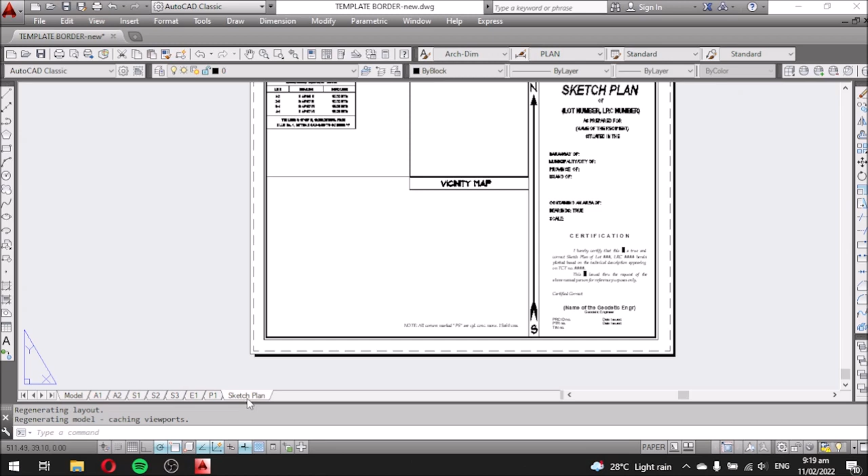Once you open the template border file that I suggest you download, you have your template border for your sketch plan. All you need to do is create your 2D drawings in the model tab. After you draw the sketch plan, you're going to arrange your drawing into the sketch plan template. Then after that, you're going to plot this in image or PDF.

First, you must transfer the title description coming from your image that you have acquired. Just like what I've said before, based on your title, there is a technical description indicated. So try to read your copy of the certificate of title.

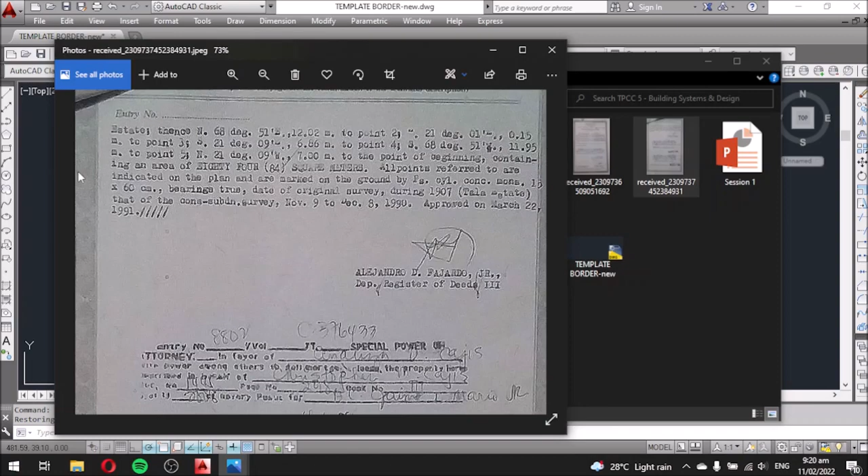To do that, we will use the text command, this icon with the letter A, then we'll write it.

We'll categorize it. First, we'll do the line. Then use the Fluxxion Architect font, if that's okay for you, the font I suggest you use.

It's small, that's okay. Next, on the left side or the right side, we have the bearing. Then on the other side, we have to put the distance.

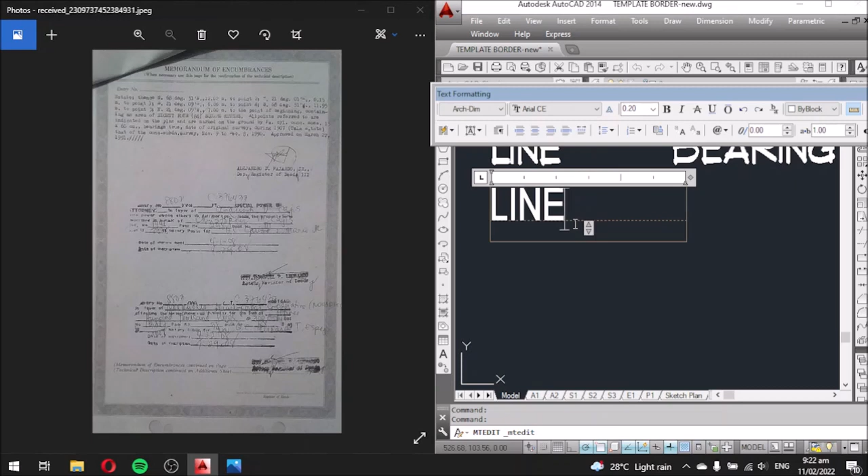Let's just copy this. To copy, simply type CO, so it's faster instead of clicking the icons. Type CO, then press enter or space. Now for this part, we'll use the font Arial CE. Just in case we need to use symbols like degrees, I think the numbers look nicer and clearer in Arial CE compared to using Fluxxion Architect font, which has a design for numbers that might be harder for readers to understand.

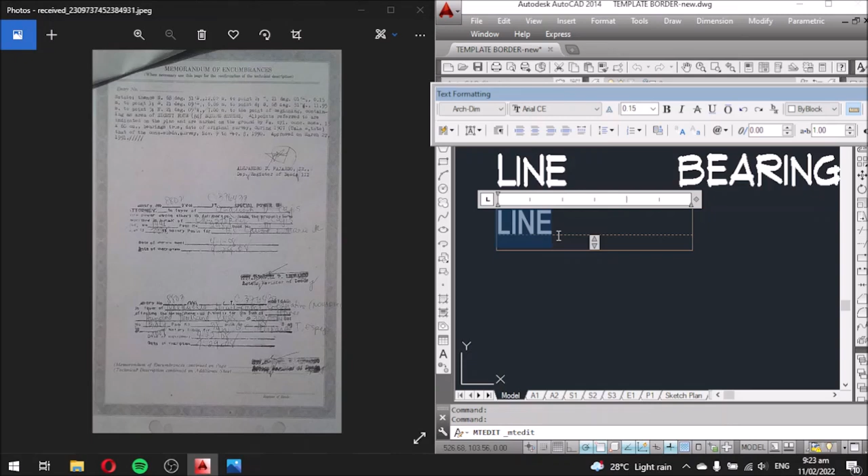Of course, our line is bounded by points, let's say point 1, point 2, point 3. What we take under this line column are the boundaries, so we'll put boundaries 1 to 2. Let's just copy, type CO down, then 2 to 3.

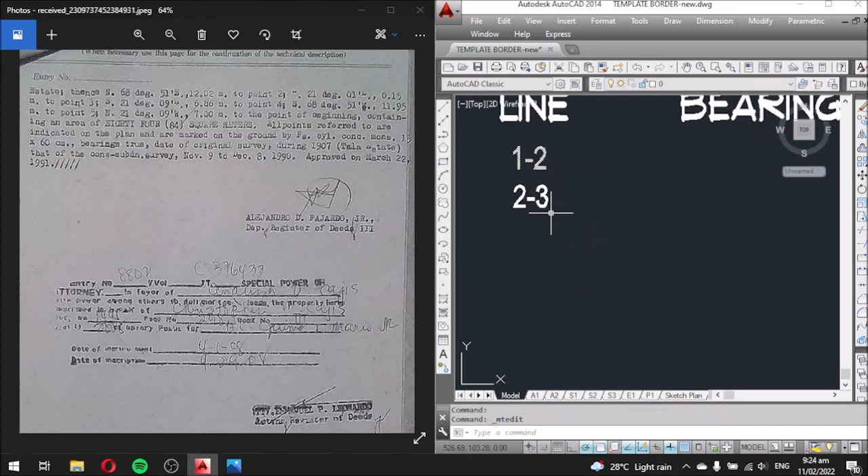By the way, you need to take note of how many points there are. So like this: point 2, then bearing distance to point 3, bearing distance to point 4, bearing distance to point 5, bearing distance to point of beginning. Meaning there are 5 points.

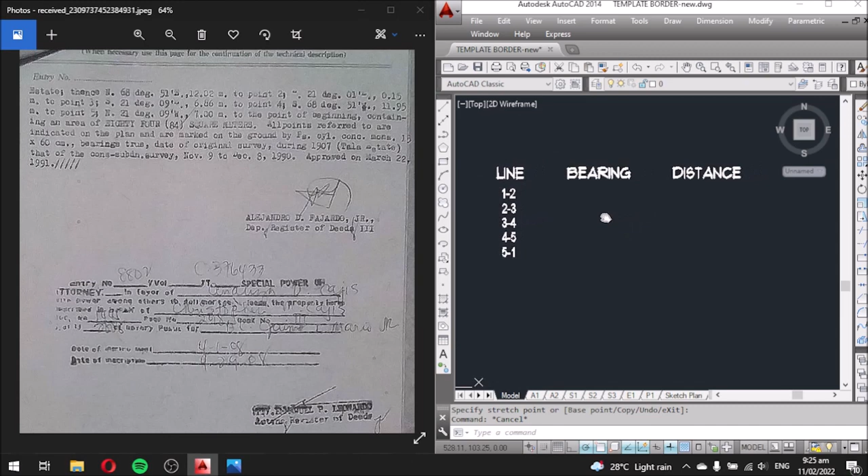So let's limit the size of the text box. On the next portion, the bearing part, let's just increase it. Now for the bearing part, our first bearing is north 68 degrees 51 minutes east.

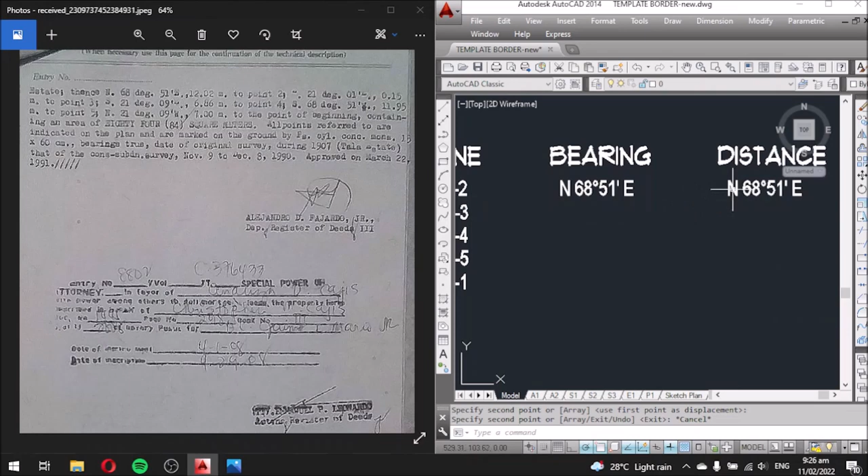So capital N, then 68 degrees - the degree sign can be found with this symbol - degrees, then 51 minutes east, space east. Then the distance: the equivalent distance is 12.02 meters, or just M.

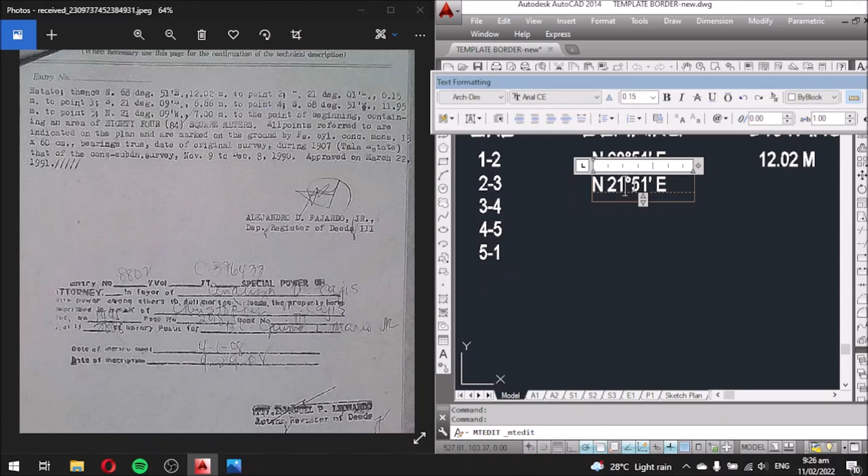Next, the second bearing, going to point 2 to 3. Our second bearing was north 21 degrees 01 minutes east. Then the distance is 0.15, so we'll put the M beside it.

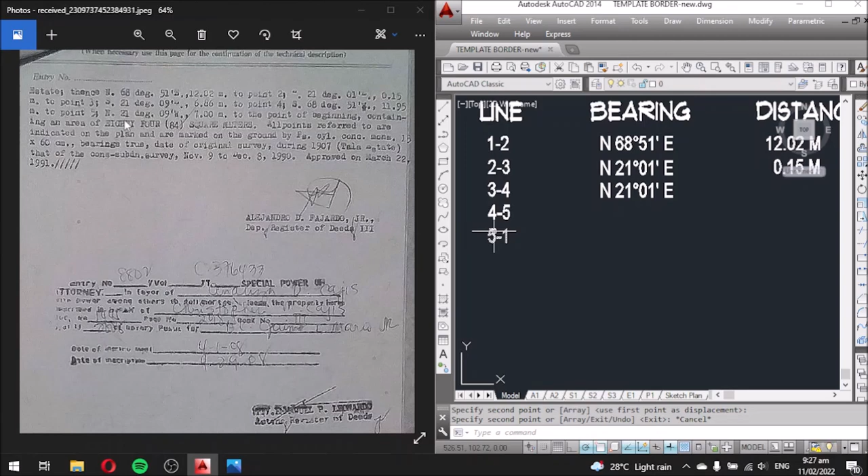Next, the second or third bearing: we have south 21 degrees 09 east. Then going to point 4, the equivalent distance is 6.86.

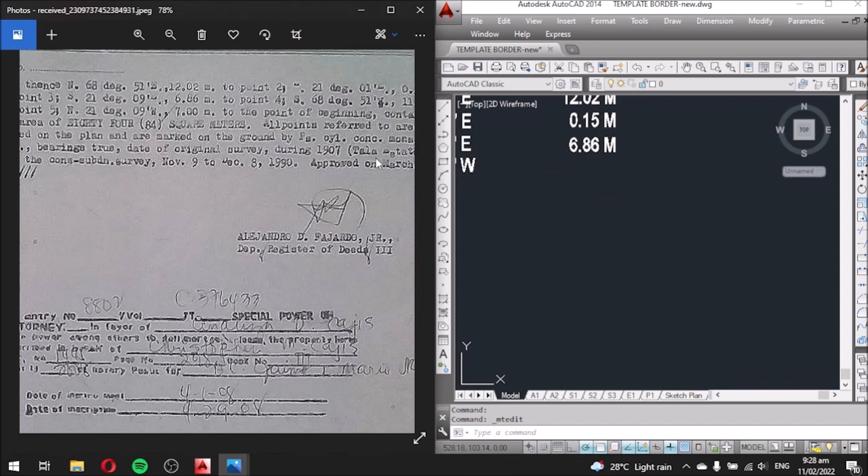Okay, so next is the following bearing, from south 21 degrees 09 minutes here, going to the next bearing, south 68 degrees 51 minutes west. Okay, its distance is about 11.95.

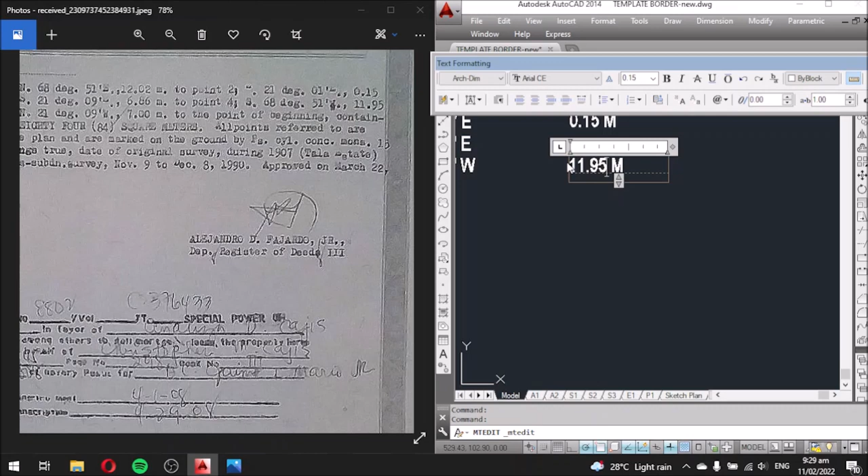And lastly, going back to the origin, its bearing is north 21 degrees 09 minutes west, and the distance is about 7 meters. Alright, so now we have complete the bearing and distance.

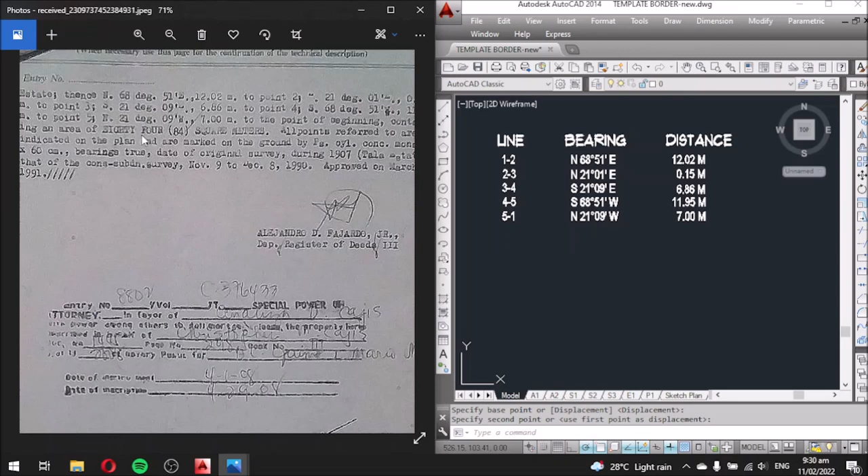So if you might want to check, you may check the bearings in case there's a discrepancy. Okay, the first line is north 68 degrees 51 minutes east, with a distance of 12.02. Then the second line is north 21 degrees 01 minutes east, 0.15. Then the third line is south 21 degrees 09 minutes east, 6.86.

Then the fourth line is south 68 degrees 51 minutes west, then 11.95. Then lastly, the line connected to the origin is north 21 degrees 09 minutes west, 7 meters.

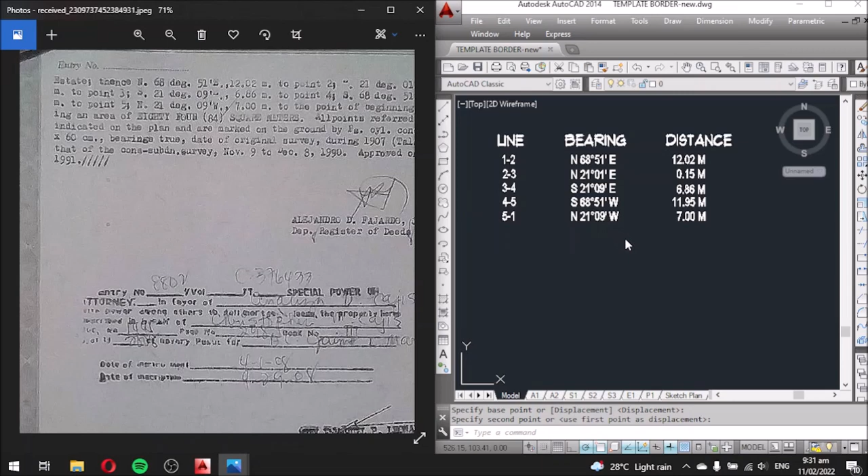Okay, now let us begin plotting the lot area. All you need to do is simply use the line command. Let's minimize this and maximize our AutoCAD application. Okay, so using the line command, first specify the first point anywhere.

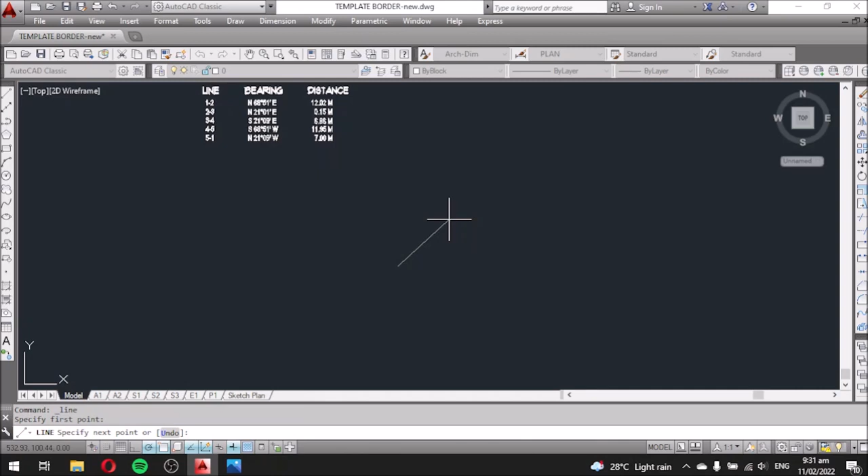Okay, first point here. Then at the bottom portion, we will type the following. Our first bearing was north 68 degrees 51 minutes, then 12.02 is its distance. At the command portion, type 'at', then distance 12.02. Take note, we are still in the line command. After clicking the line command, click the origin point on the open space, then you type this.

Then type the less than sign, pointing the arrow going to the left. Then type the bearing: north, small letter N is fine or capital letter, then 68 without space, 68 degrees. You can just type 'D' for degrees. Then the minutes is 51.

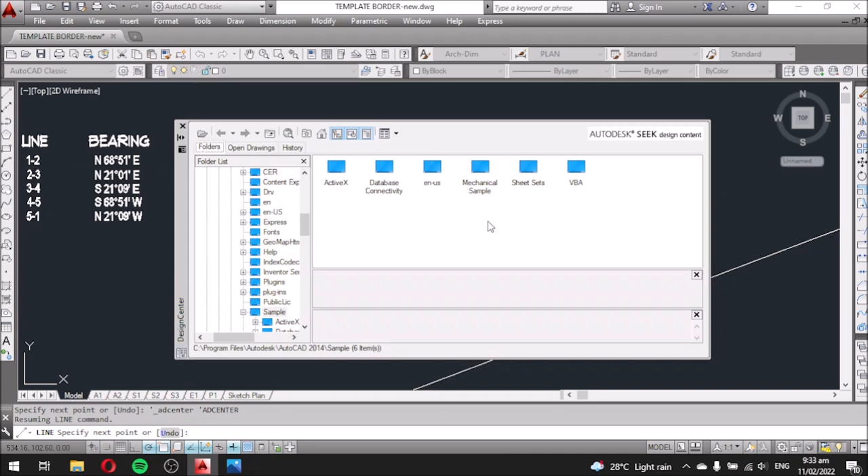Okay, at, 21... distance first, 0.15. Okay, so arrow, less than N 21 D, 01 or just 1, then the quote symbol, then E, then enter.

Next is at, okay, the third bearing we have 6.86. Okay, arrow, then S 21 D 9, quote, then E, then enter.

Next is the fourth. Okay, so at 11.95, less than south, 68 D 51, quote, then W, then press enter. And lastly, at 7, less than N 21 D 9, then quote, then W, west. Okay, so that's it.

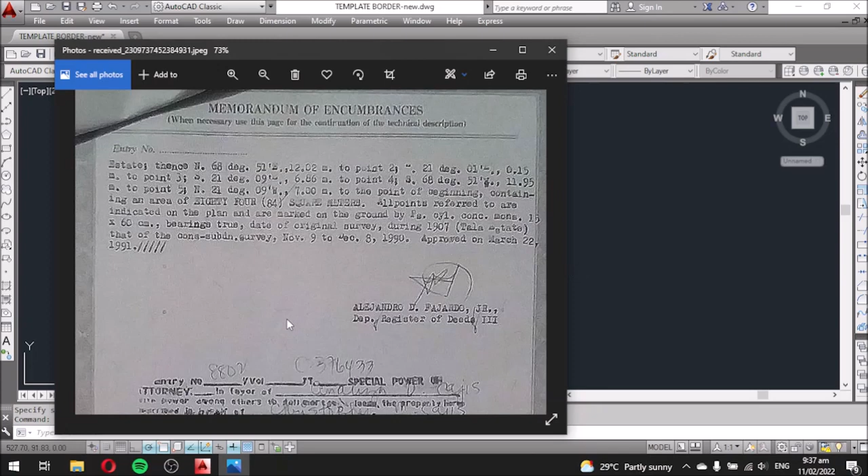Okay, balik ka sa imong description. You need to specify kung unsa tong mga adjacent niya nga mga lote. Dito ka tan-aw sa imuhang first page, sa imuhang title. So basahon nimo class, no?

A parcel of land, lot 109, block 1 of the cons-subdivision plan, PCS 13-0032. So mo ni siya gamiton nimo sa kadong pangalan sa imuhang nakabutang diri sa template, no? Kini siya, no? Lot number and LRC number.

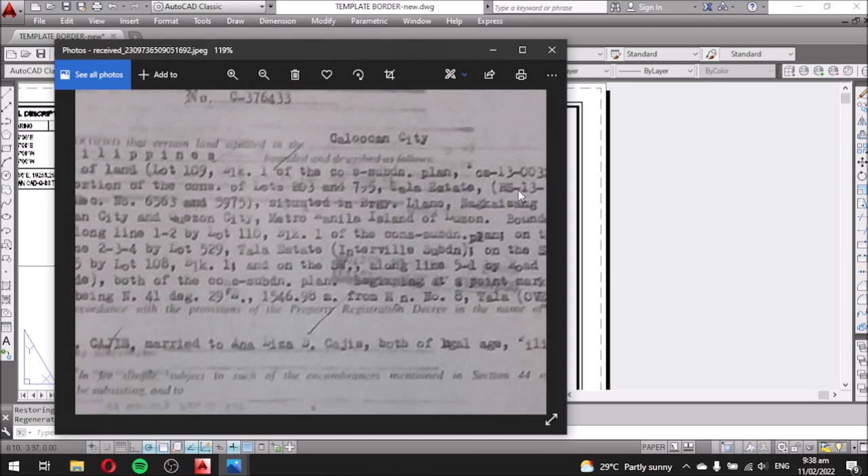Next, 14 being portion of lots 203 and 755, Tala Estate. Okay, dili kay nako maklaro, so gwapo lay magkuha mo ka ng klaro nga kopya, no? Okay, so LRC reference number and situated in Barangay Llano, magkaisang Nayon, Caloocan City and Quezon City.

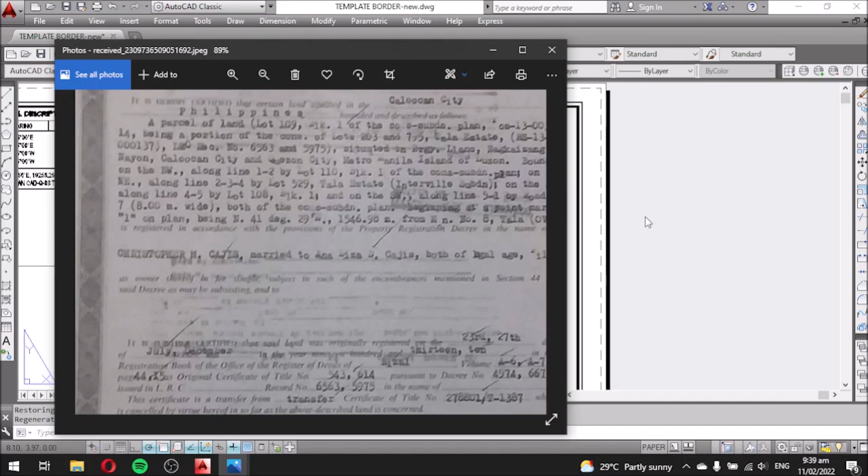So bounded on the northwest along line 1 to, mo ni siya class, no? Akong buot pasabot unsa mo ni siya description kung unsa nga mga lote ang adjacent sa inyuhang lot, no? Along line 1 to by lot 110, block 1 of the cons-subdivision plan. Unsa ni siya nga di ko kaklaro ani. Atong ibutang nato ang unsa nga lot area o lot number ang tapad sa ato ang lote. Balik ta sa atong model.

Ang ato ang points nato i-designate sa tag mga points, ha. Ato lang sa ni siya mag-copy tag text, temporary lang, no. So we have 1, point 1 ni siya. Tapos kini siya is point 2, point 3, point 4, point 5. Okay, 1 to 2, no? Tapos 2 to 3. Okay, 3 to 4. Okay, 4, 5.

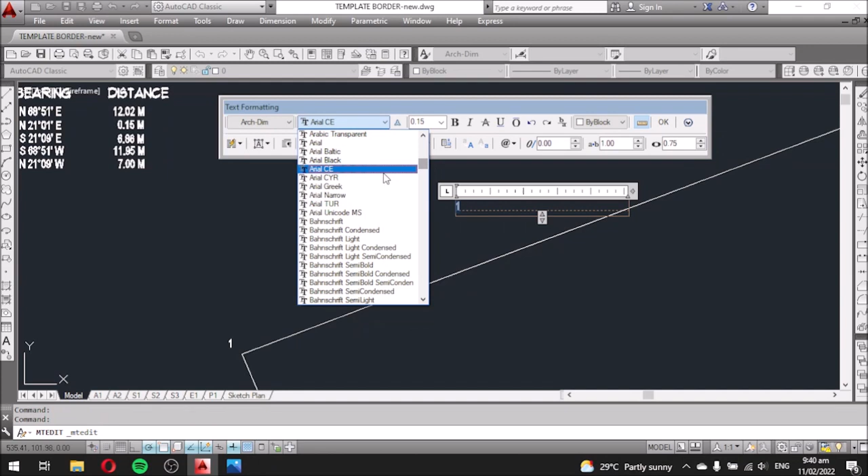Atong text na itong agamiton dire, we will be using the font nga Flux Architect. Kuha na lang, i-Arial na lang para standard. Gamiton na lang nato ang Flux Architect for title na lang. Tapos kuha na to siya, dako-dako na to yung kuha, size.

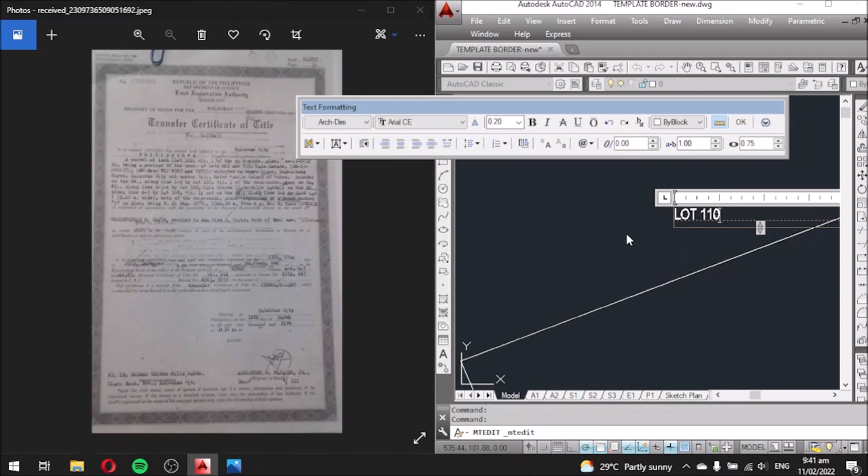So that is lot number, lot number 110. So much better siguro gato nga naon. Okay, 110, no? 110. Next.

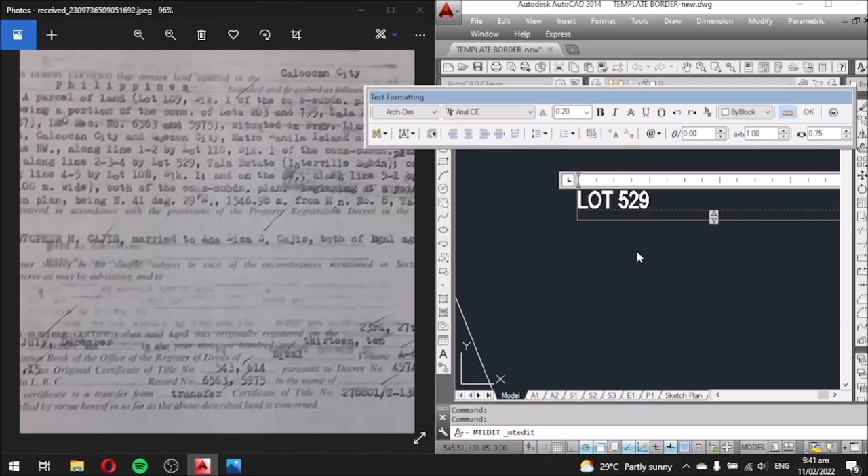Sa line, along line 2, 3, 4 by lot 529, no? Lot 529. Sa may 2, 3, 4 daw, okay, lot 529. Atong gi-copy. So dire nakabutang is lot 529. Then ang sa 4 to 5,

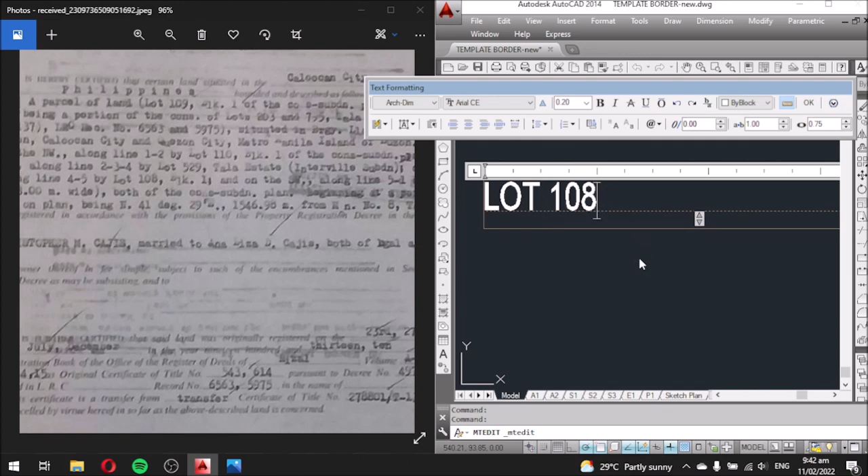Atong 4 to 5 is by lot 108. So therefore, ang ato ang lot nato is 109 based on what is described by the lot title. Mo ni siya, no? 109. Okay, 109. Okay, dayon ang sa 5 to 1.

So along line 5 to 1 by road lot 7, 8 meters wide. Or kung kuan class, kung maka-indicate gani siya nga karsada gani class, ang inyong ibutang na lang ninyo is road na lang siya, no? Or pwede nimo indicate ang lot, dayon i-indicate nimo siya nga road. Kaya importante sa lote class nga mo-indicate kung asa dapita ang karsada. Okay, lot 7.

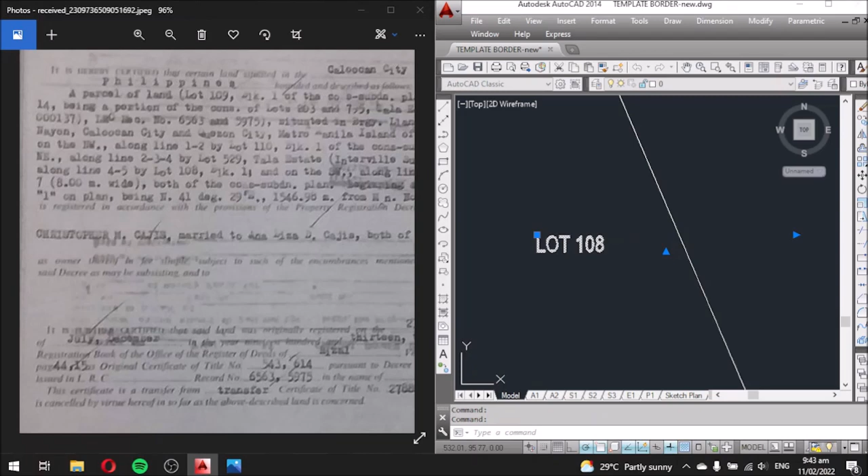Okay, butangan nato road, your road. Tapos rotate RO, no? RO for rotate. Okay, humana ang ato ang description, no? Pwede na nato siya ma-kuan ato ang layout.

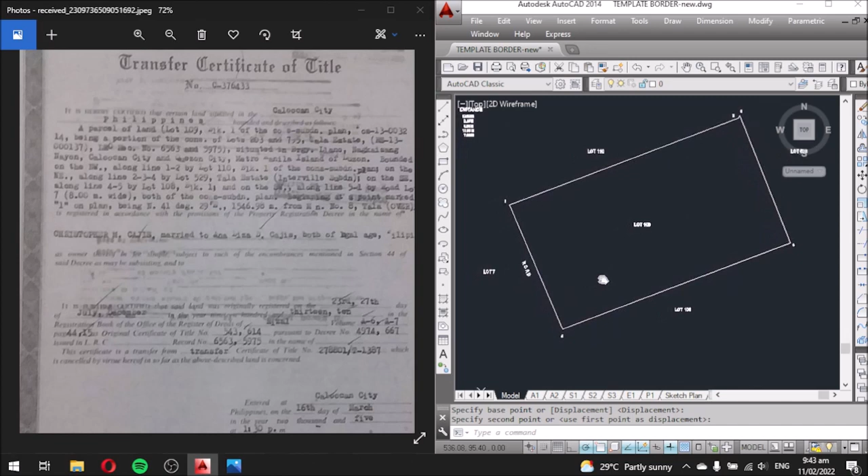So the next part of this one is mag-create ta og kuan, i-highlight nato ang ato ang kini siya nga lot, no? Using the polyline. So we have PL. Make sure ang kuan niya, ang width niya is equivalent to 0.01, no? Makita niyo 0.01.

So we have, ito siyang i-click each. Oh my god, kuan siya, no? Cancel. Okay, width, na-click din ako. Okay, so next, kung makita niyo sa class, baga siya nga line, no?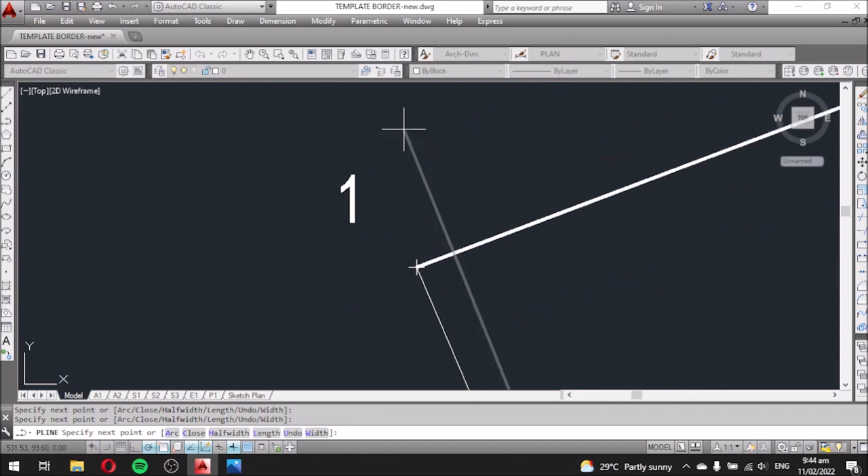Then dayon maghimo ta og polyline, which is kuan siya, no? Broken line. So along to, pwede ra mo mag-assume class, no, unsa iyang kuan. Pwede po dato siyang ita say parallel lang dire kay mura man guni siya subdivision lang guni siya. Okay, subdivision.

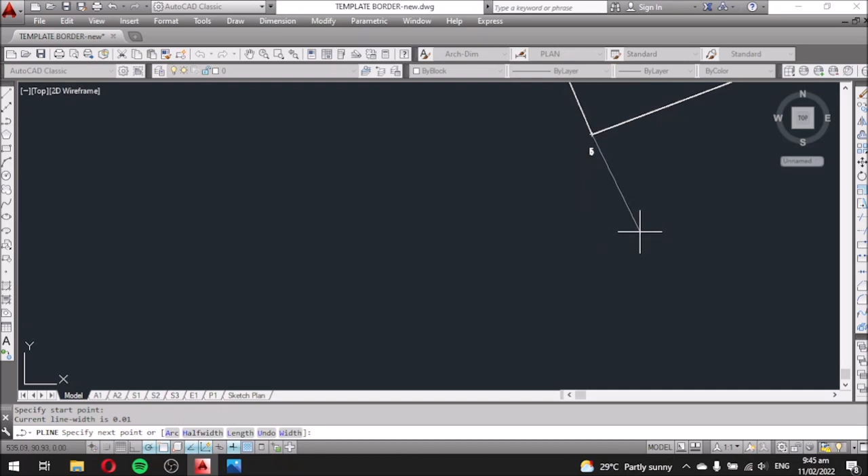I-straight lang ninyo. Now, to make it straight, i-guide nimo bali ang inyong cursor, i-click, mura sa siya i-click kanang i-move lang inyong cursor dire sa katong adjacent niya nga line, tapos sa imo lang siyang ipadagan. So extend lang nato, extend pa. Anyway, dili siya kinahanglan nga perfect, no? Kuan naman ni siya, reference line naman ni.

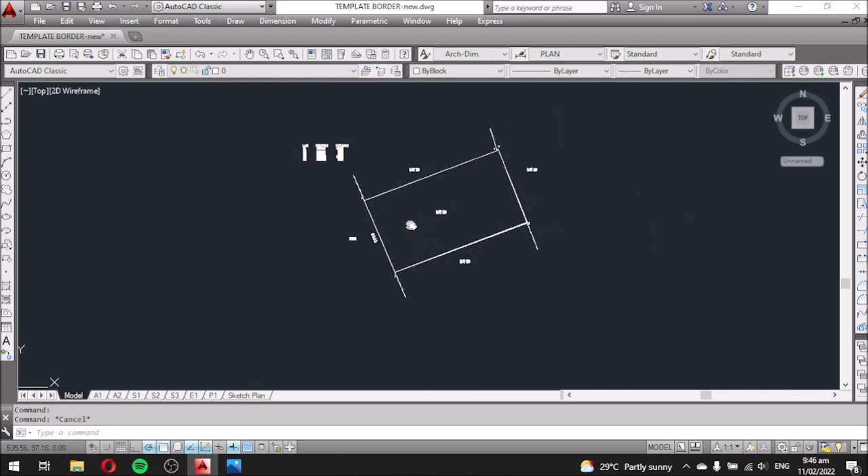So the next part, para maka-create ta og broken line, i-change nato ang ato ang characteristics sa ato ang line, no? Asa man na buhaton? Diri dapita, no? So we have, i-click lang nato sila, ipang-highlight nato, then use the hidden line. So nanakay hidden line. So let us complete first, no, kung unsa nga ato ang description nato de.

So pila ang ato ang lot area. Ang ato ang lot area nato dire is equivalent to, lot area equal to, based on sa description, no? I think naka-indicate, so that is 84 square meters. Gamay kay siya class, no? Square meters.

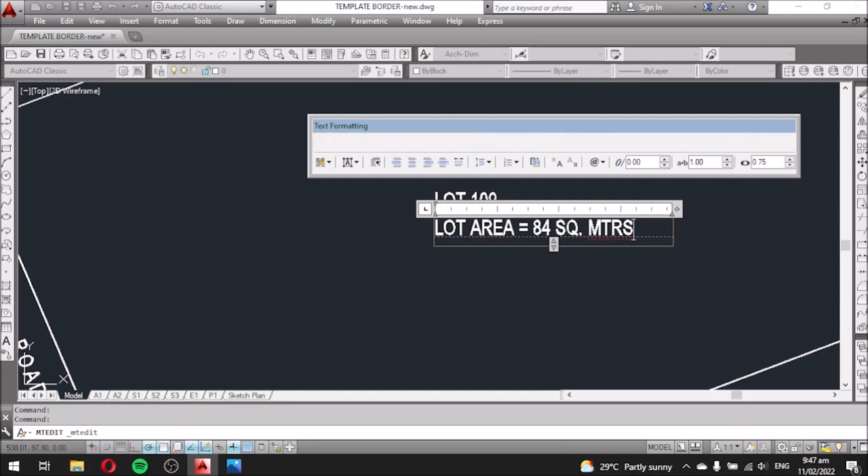Ato lang siyang ipadaplin, no? Ipadaplin nato siya gamay. Then, ang sunod natong buhaton was the vicinity, the vicinity map. So, save lang sa nato, no? Just in case mu-brownout ba. So, ay mo kalimot og save class, no?